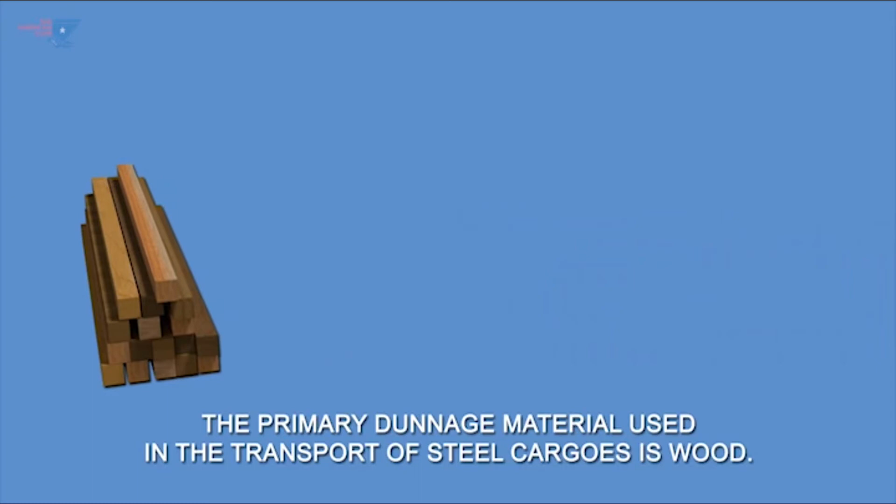Dunnage. The primary dunnage material used in the transport of steel cargoes is wood. Numbers, dimensions, and arrangement of the dunnage is largely dependent upon the weight, dimension, and contact area of the cargo. These arrangements must be discussed and mutually agreed by the master and charterer shipper prior to loading the cargo.

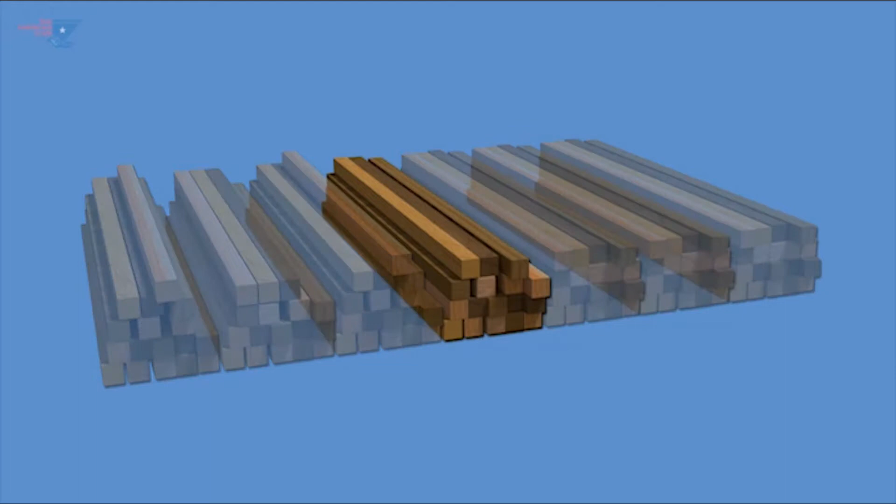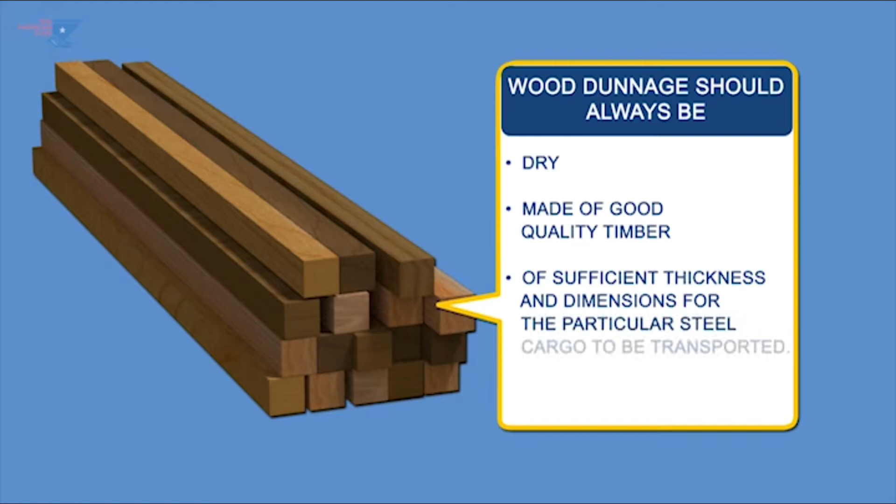However, under any circumstances, dunnage wood should always be dry to prevent moisture transferred to the cargo, made of good quality timber and not splintered or damaged, of sufficient thickness and dimensions to be fit for purpose for the particular steel cargoes being transported, and certified phytosanitary to ensure the wood is free of pests.

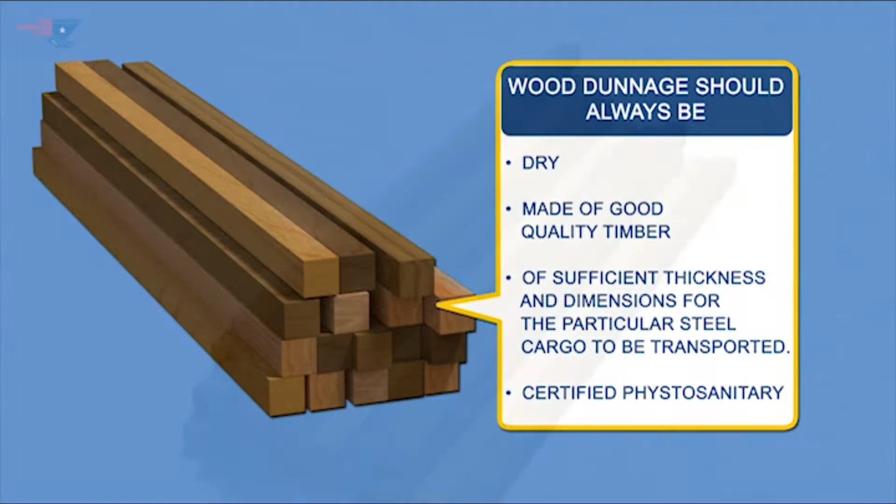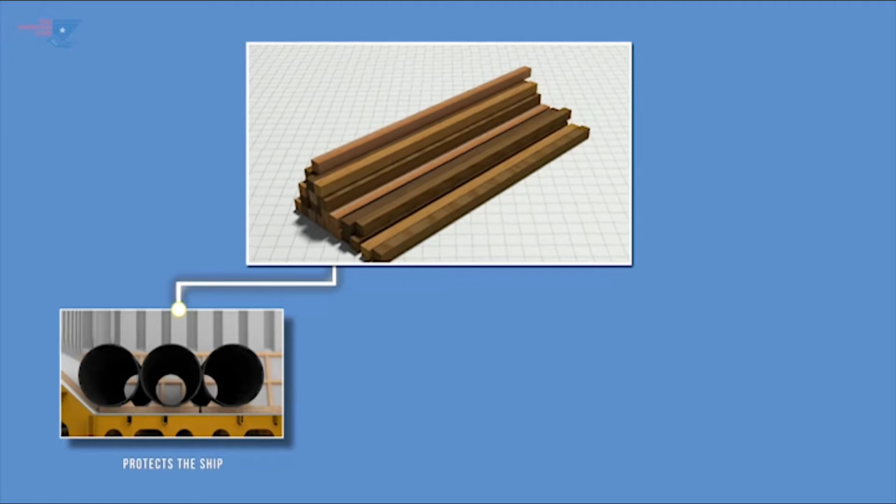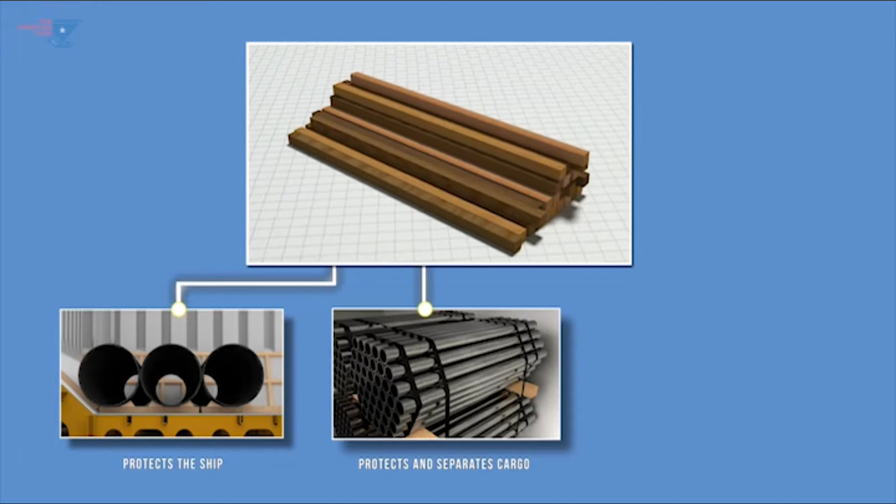Dunnage performs three basic functions in cargo stowage. It protects the ship's structure from deformation by spreading the load stress to a larger area, impact and other damage during loading and transportation. It separates cargo into different bundles or consignments. It protects cargo from being damaged by contact with other cargo or the ship's structure. It allows access for lashing, re-slinging, and discharge.

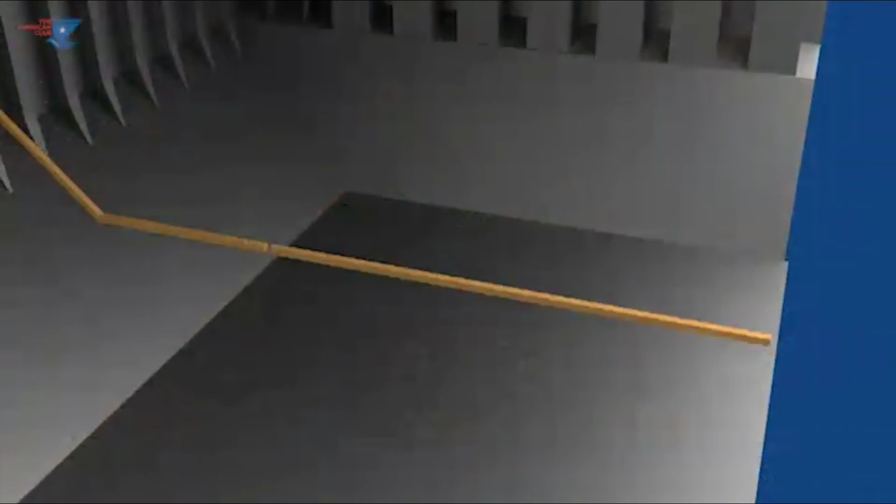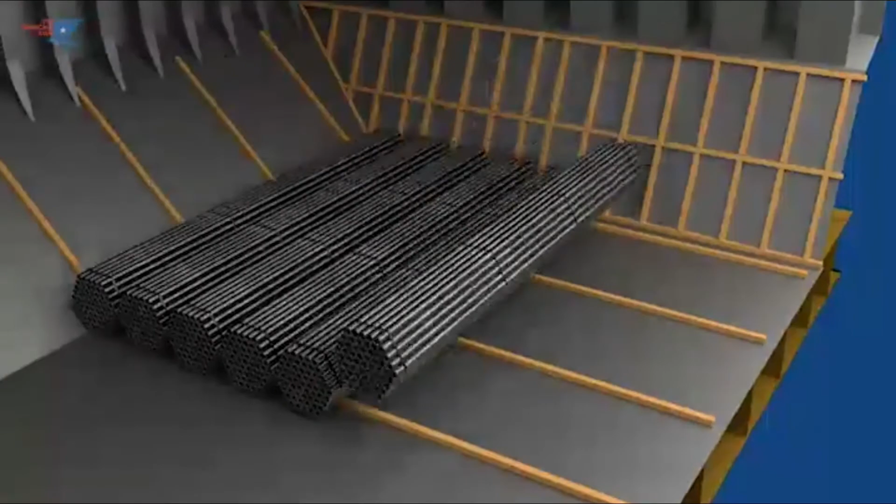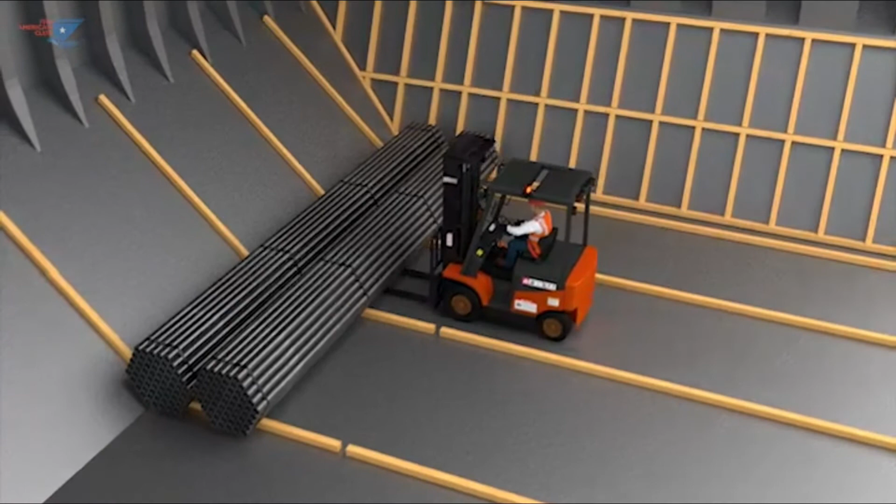The first layer of dunnage is laid on the tank top, hopper sides, and any bulkheads or frames that cargo may touch. This protects the cargo from mechanical damage against the ship's structure and vice versa. Floor dunnage protects the tank top and raises the cargo off the deck. This allows forklift or other access beneath the cargo when discharging.

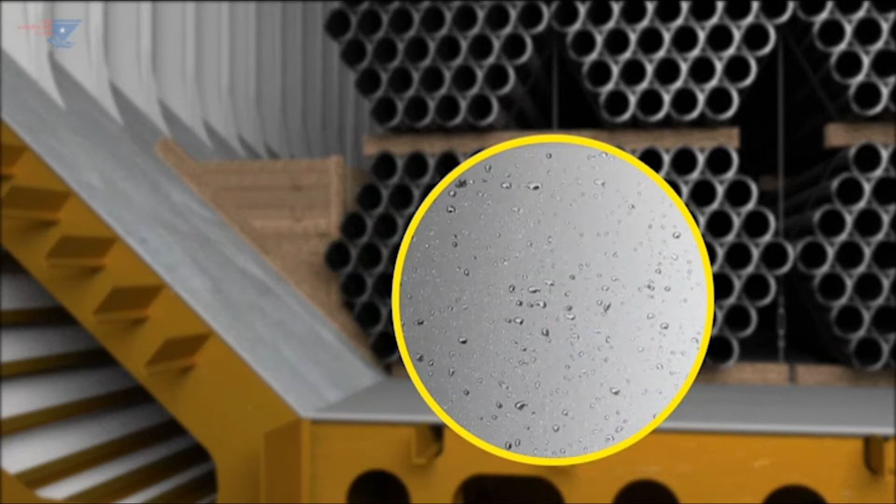Dunnage laid on the ship's structure also helps prevent moisture damage of the cargo due to ship sweat as sweat rolls down the vessel's shell plating. As most steel cargoes are stowed fore and aft in the ship's hold, the first layer of dunnage is usually laid transversely. Suitable gaps must be left to allow drainage of sweat to the bilge wells.

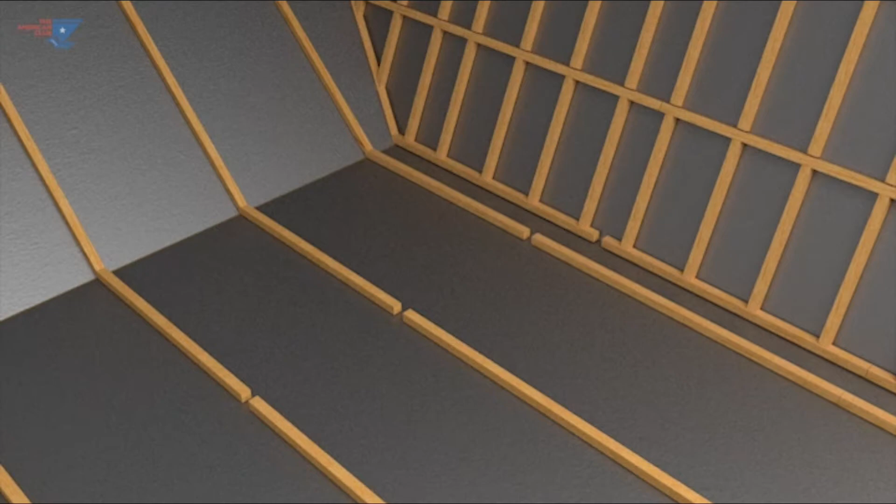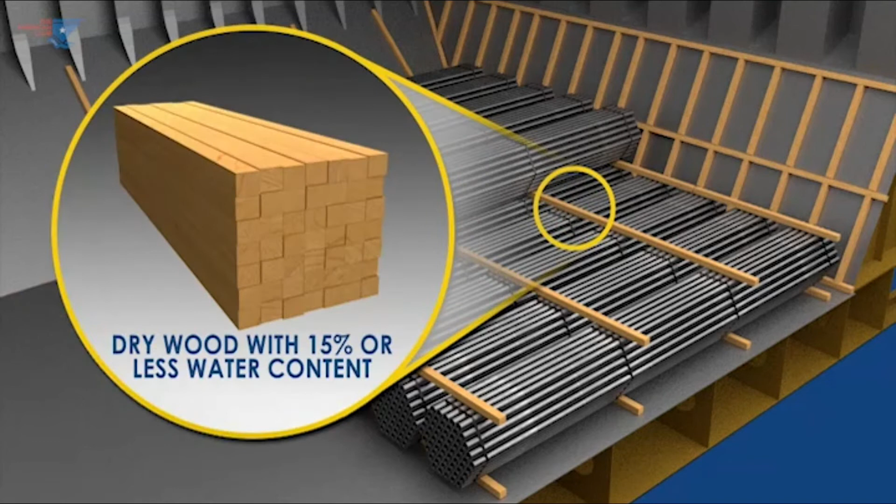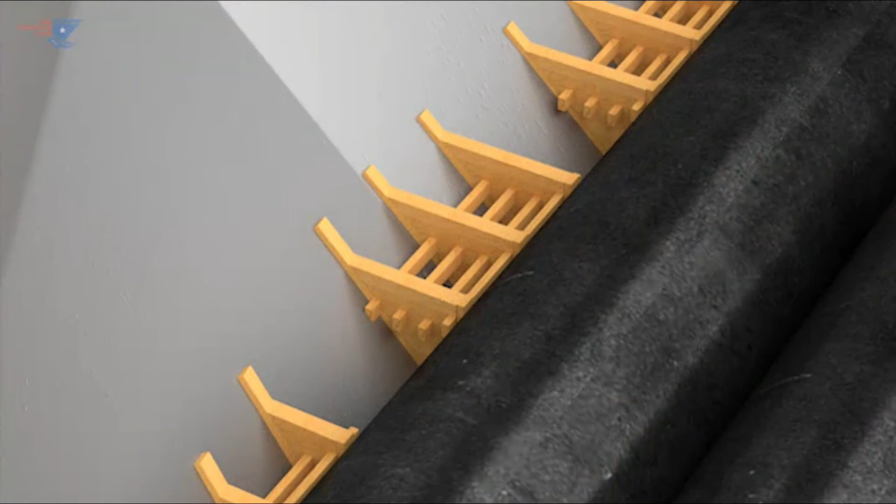The second layer of dunnage between tiers of cargo separates cargo and fills any void spaces. It also allows access for re-slinging and discharge. All dunnage should be of dry wood, whose water content is no greater than 15%. Usually water content ranges from 12% to 15%. The dimensions or construction of dunnage used must be suitable for the loads likely to be imposed.

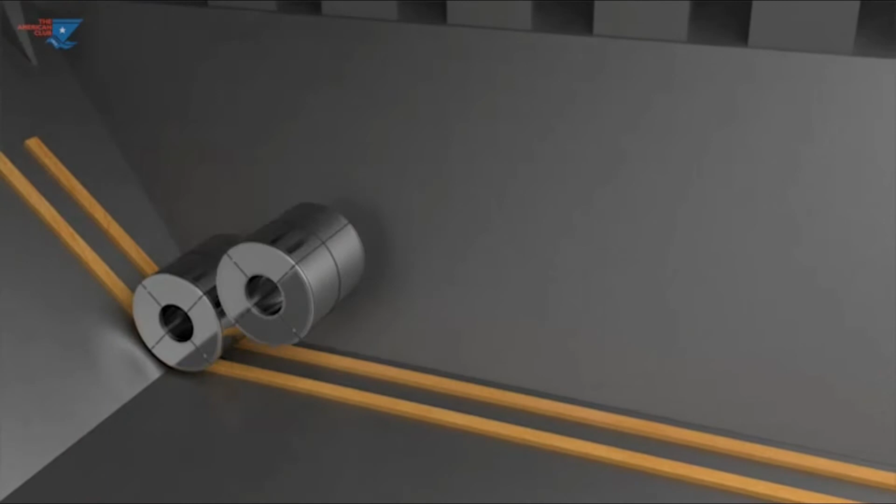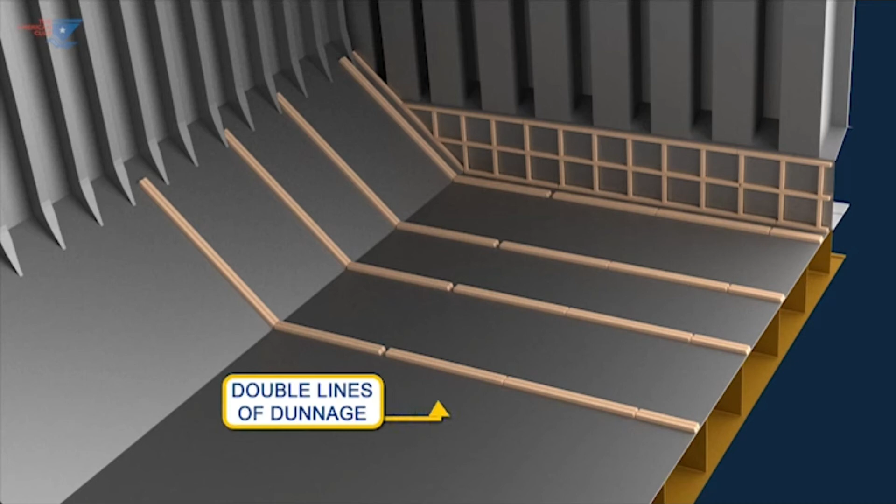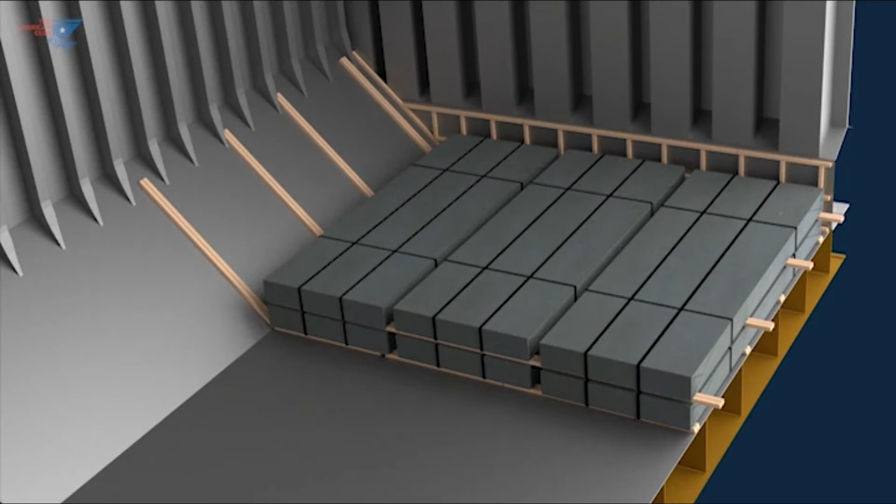Steel coils. For information on dunnaging of steel coils, please see Module 1 of this video series. Sheet steel packs. Because of the size of packs, double lines of dunnage should be laid transversely on tank tops and hopper sides before packs of sheet steel are loaded. Additional double lines of dunnage should be placed between each subsequent tier of cargo. Upright dunnage or constructed void-filling dunnage should occupy any spaces between packs of plates and/or ship's side.

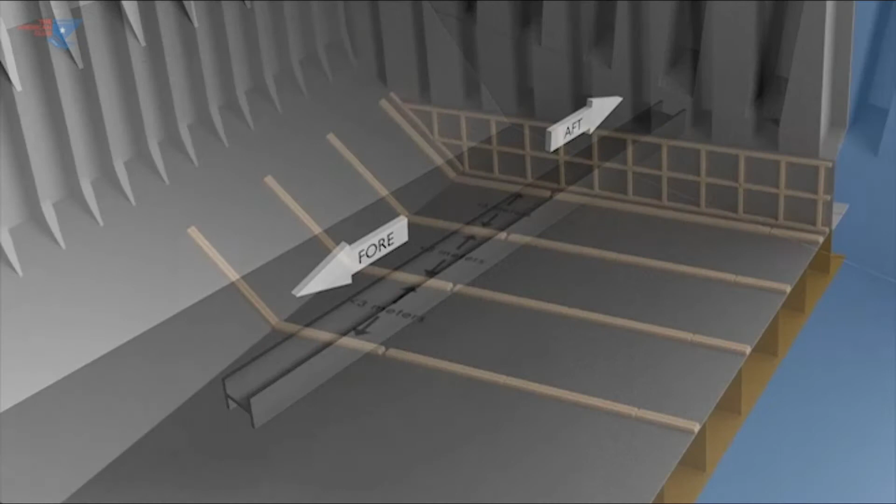Steel girders and other constructional steel. These are always stowed in a fore and aft direction. Dunnage should therefore be laid transversely on tank tops and hopper sides. Dunnage should be laid at sufficient intervals along the length of the steel to prevent any bending or deformation. This is usually no more than 3 meters. Each tier of cargo should be separated by a layer of dunnage laid vertically above the previous layer.

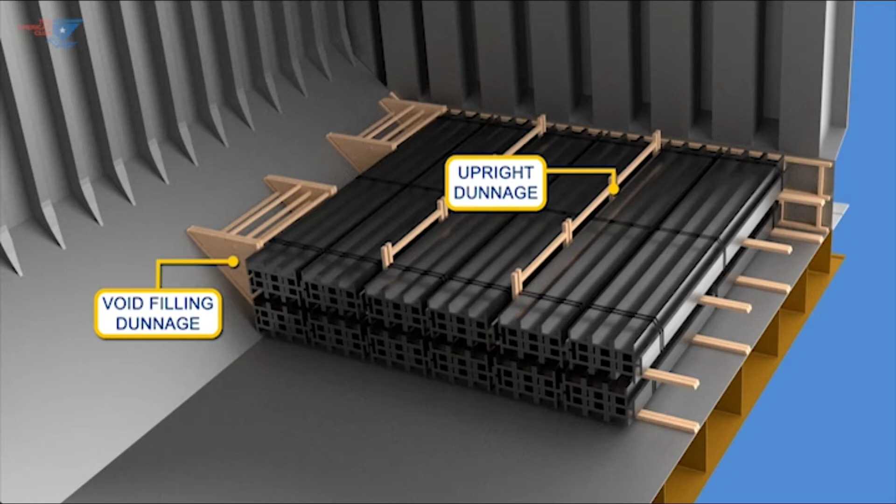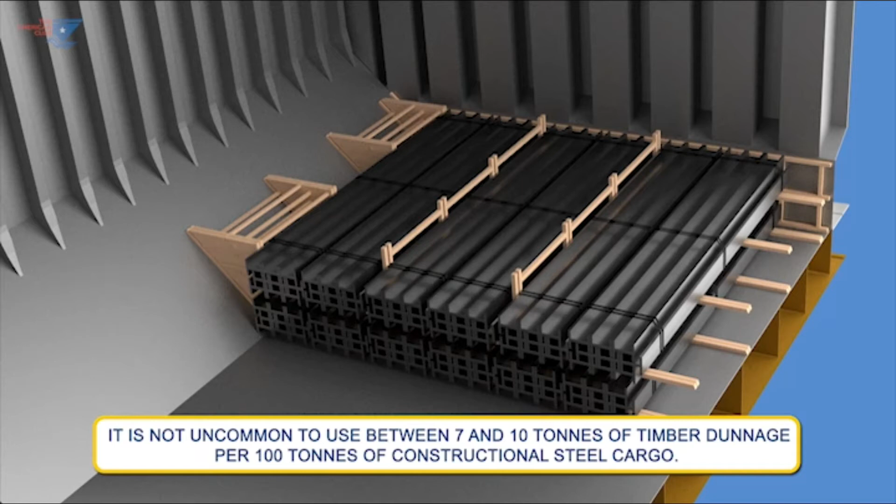All voids between girders or packs of girders must be filled with dunnage. Dunnage must be used to bridge any gaps between the cargo and the ship's side. It is not uncommon to use between 7 and 10 tons of timber dunnage per 100 tons of constructional steel cargo. Girders should be stowed so that the flanges of each successive beam are alternately inside then outside the one below.

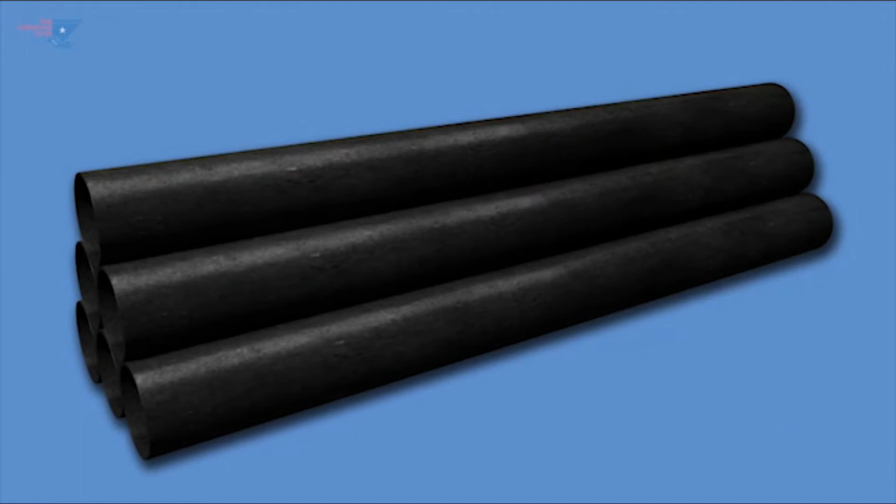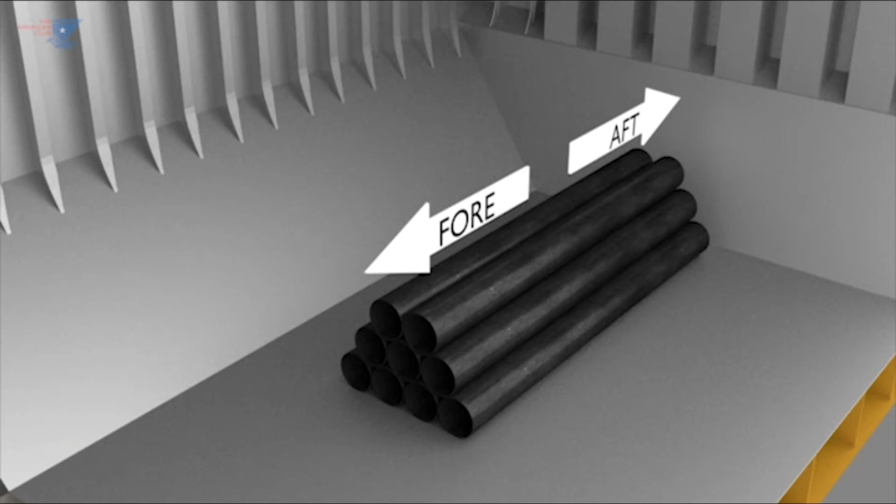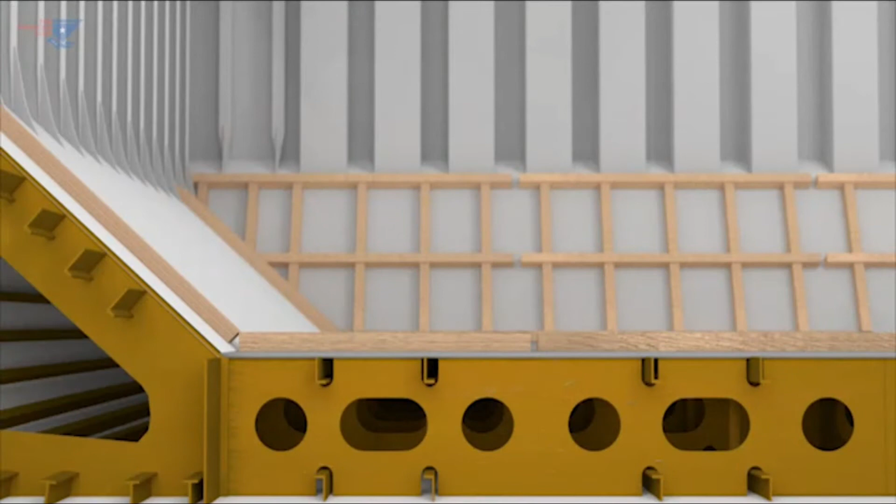Large diameter pipes. Large diameter pipes are relatively much less dense when compared to other steel cargoes. They also have a low coefficient of friction. They are stowed in a fore and aft direction in both the ship's hold and sometimes on deck. Double lines of transverse dunnage should be laid on tank tops, hopper sides, and on decks and hatch tops if to be used. The dunnage should be laid at sufficient intervals along the length of the pipes to prevent any bending or deformation. Each pipe should be loaded on this dunnage.

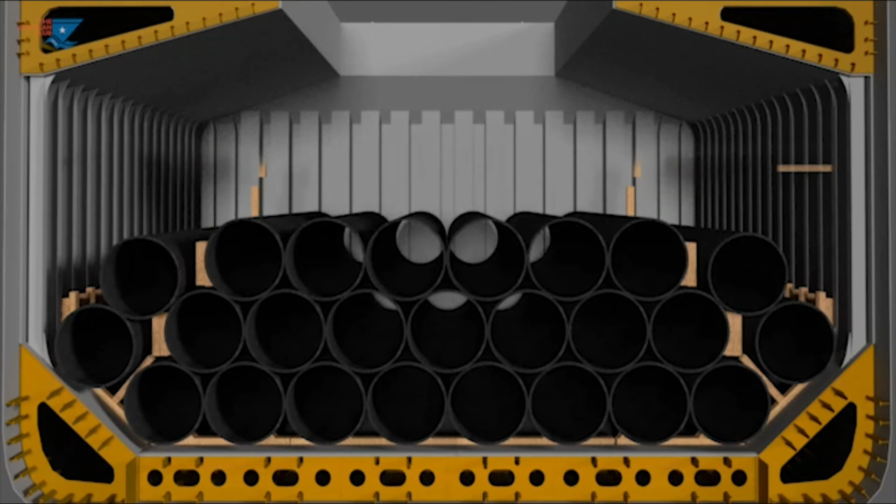A wedge is then jammed into place to the bottom dunnage on each side of the pipe to prevent it from rolling. Preferably, pipes should be stowed hard up against one another. Where the possibility of damage prevents this, they should be stowed as close as possible. Vertical dunnage is then wedged in to ensure the stow is solid and there is no room for movement of pipes. Any voids must be filled with dunnage constructed so as to resist the forces likely to be generated. Each successive tier should be stowed in the cant line of the tier below. Stows must not be too high, as this can cause compression damage of the pipes in lower tiers.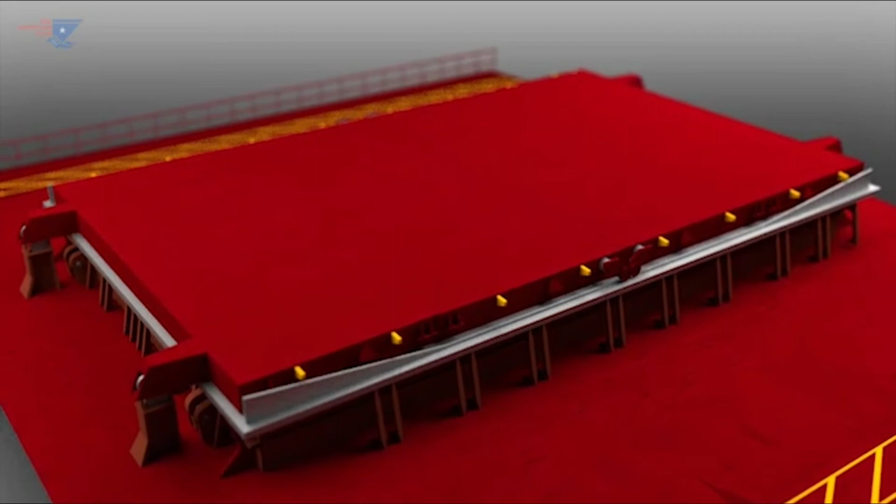It is recommended that steel cargoes are not stowed or carried on deck or hatch covers. In some cases, however, due to the configuration of the cargo or ship or other factors, carriage of steel cargoes on deck is unavoidable. When this is so, the dunnaging, lashing, and stowage arrangements and all other safety precautions and considerations must meet the requirements of the charterers responsible for stowage of the cargoes.